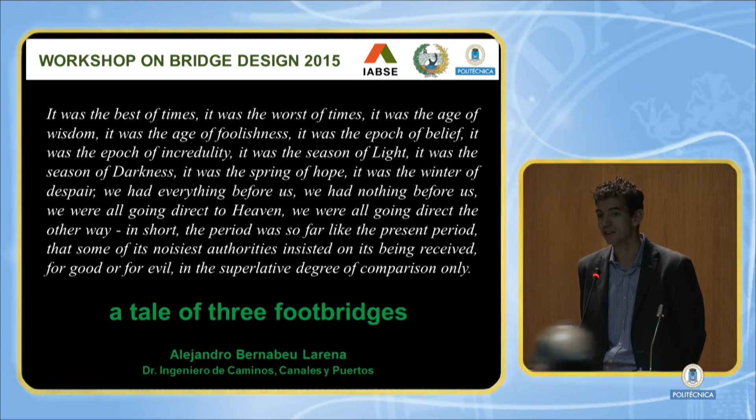Good morning. I want to thank the organization committee for inviting me to participate in this workshop on bridge design. I've borrowed the title of my presentation from Charles Dickens' A Tale of Two Cities, partly because of its famous opening lines that could easily apply to our current social, architectural, and engineering situation: it is the best of times, it is the worst of times, it is the age of wisdom, it is the age of foolishness, it is the epoch of belief, and it is the epoch of incredulity.

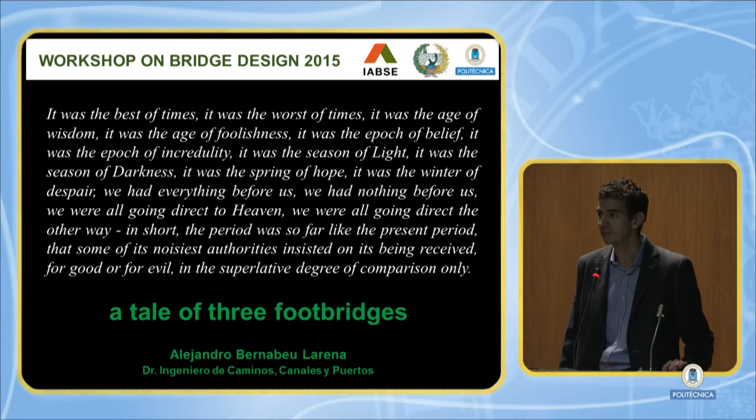But I also borrowed the title because the purpose of this presentation is to openly narrate the design process of three footbridges, considering the design criteria as well as the main technical issues.

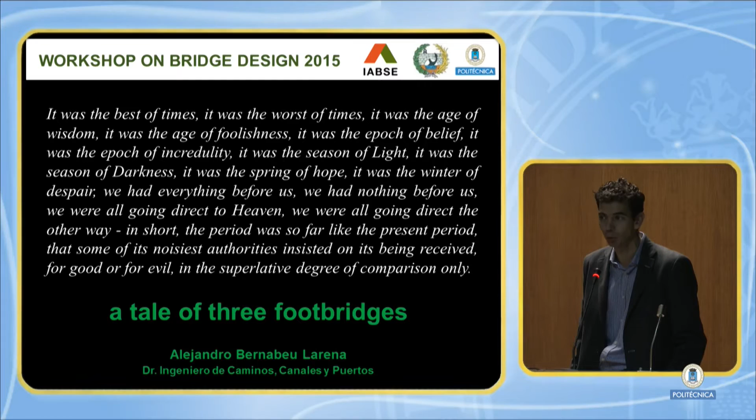A particularity of these three projects is that they have all been done in collaboration with the same architects, Ginés Garrido and Francisco Burgos. The first footbridge is located in Madrid and is part of the huge urbanistic operation of Madrid-Río, all along the Manzanares River through the city.

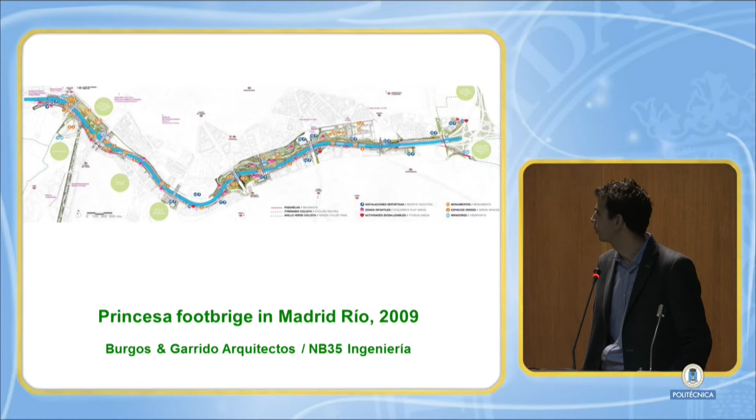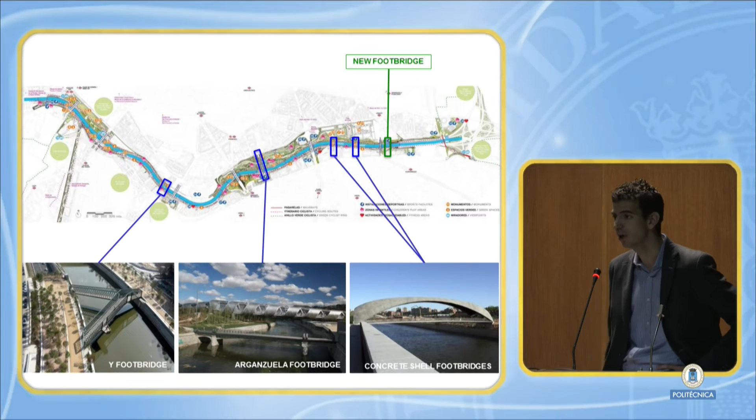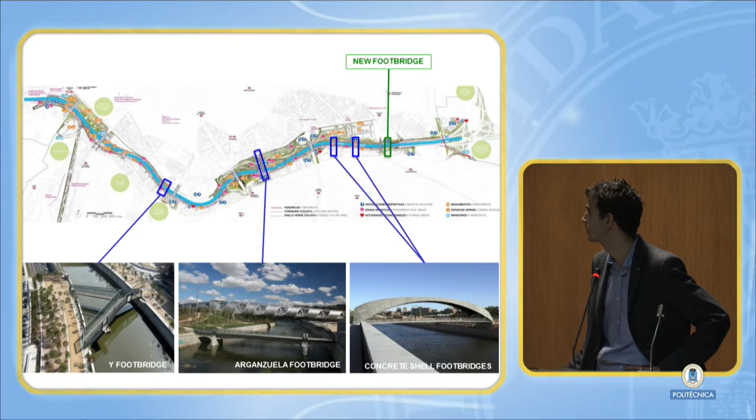When this project was designed, a number of most of the operation was already under construction, including some very singular and interesting footbridges, like the twin concrete shell footbridges, the big spiral footbridge, and the Y footbridge. This is the location of the new footbridge.

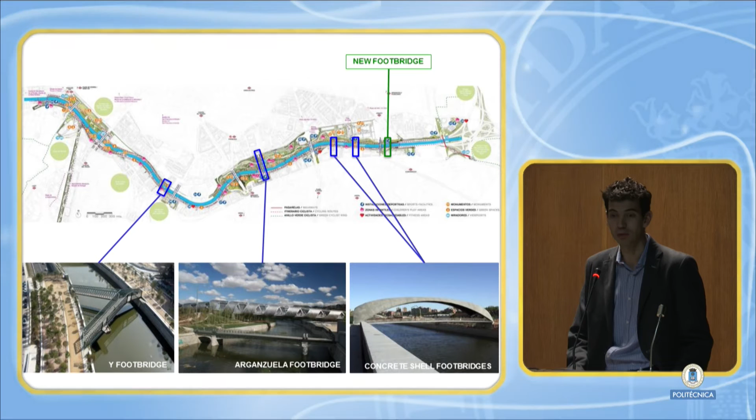With this context, and considering also the criteria of ease and rapidity of construction and economic restraint, we proposed a very simple, straightforward solution—the purpose was almost for it to be unnoticed, as if the footbridge was already there before the operation was done.

The footbridge is just a 43-meter span, straight line, with a very uncomplicated structure formed just by a couple of plain web steel beams located at both sides of the deck that also serve as handrails.

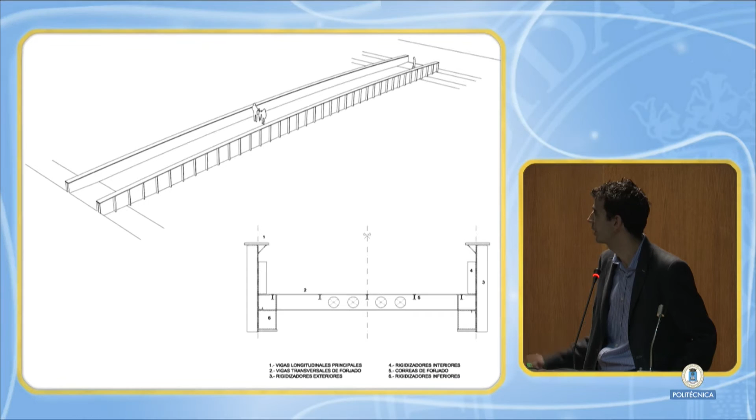It's a minimalistic solution in terms of composition, but with a couple of key aspects: the slowly varying width of the footbridge, and the location of the stiffeners seen from the outside, with the underside edge free. That marks a rhythm of the structure as well as a kind of discontinuity and variation.

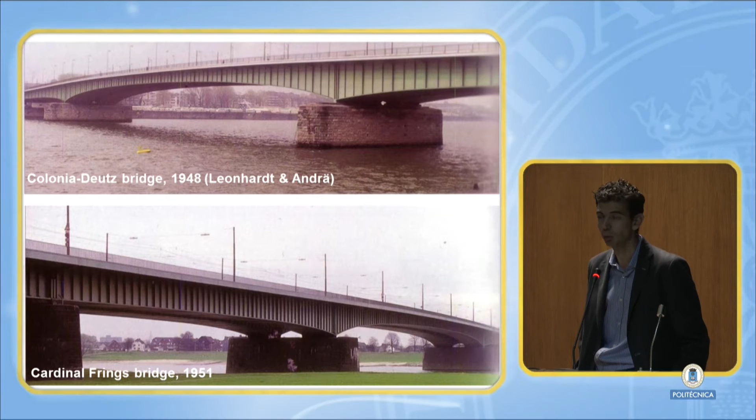It's also a small tribute, through the pale green color of the footbridge, to the fantastic German bridges built after the Second World War, such as the Colonia Deutz Bridge by Leonhardt and Andrä, or the Cardinal Frings Bridge.

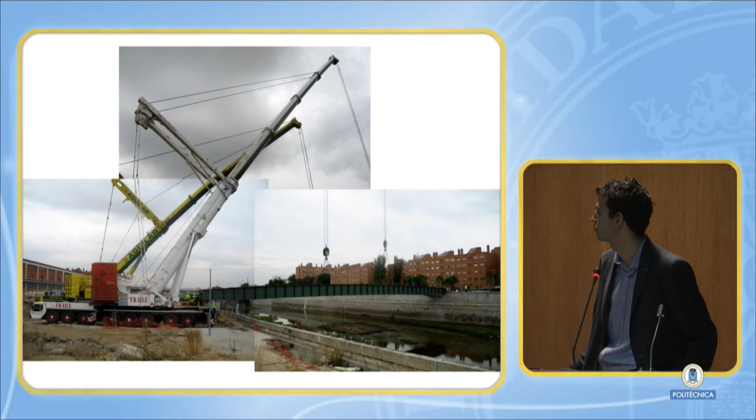The construction process was very simple. The two beams came directly to site and were set in place with the help of two cranes. The footbridge finally opened in 2009.

After this project, together with the architects, we decided to enter a proposal for an international competition for a new footbridge in Maribor, Slovenia, over the Drava River, covering a total length of 120 meters.

The most important aspect of the location for the new footbridge was its closeness to the Stari Most, the old bridge of the city, which is a three-span steel arch bridge. We decided not to compete with the existing bridge, but instead to value it.

We proposed a bridge very close to the water level, not a big structure, mirroring the three spans that the existing bridge had.

So we proposed a continuous band with a similar structural configuration of double steel beams. In this case, the shape of the beams was adjusted to form a continuous deck that was covered with wood. Technically, there was not much complication, only dynamic aspects, which I'll comment on later, following the same principles as the Princesa footbridge.

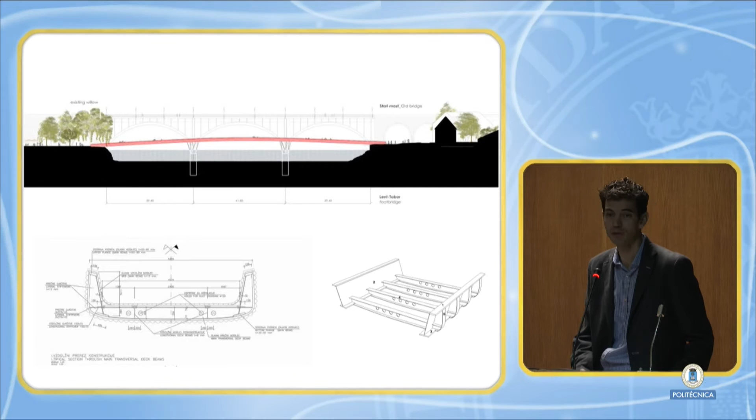An interesting issue was related to the design of the piles, proposed to be as delicate and transparent as possible to maintain the continuity of the deck.

In this sense, we proposed a set of thin steel tubes inclined in an apparently random composition, but actually related in some sense to their structural requirements.

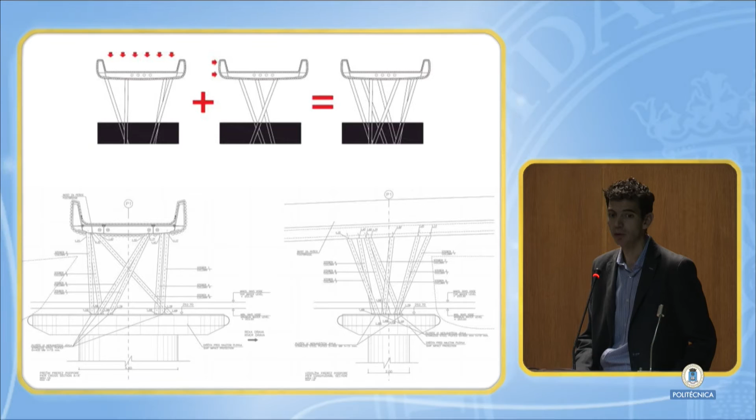Four of these steel tubes are located on either side of the deck, so they can directly support the vertical load that comes through the steel beams, while the other three are located in the center area of the deck and are much more inclined, so they can directly assure the lateral stability of the footbridge.

Here we have an image of the proposed footbridge, where we can see the transparency of the proposed intermediate piles, as well as the continuity of the deck.

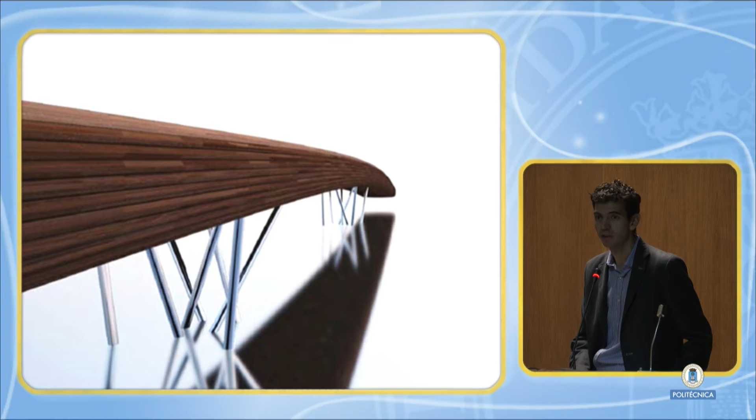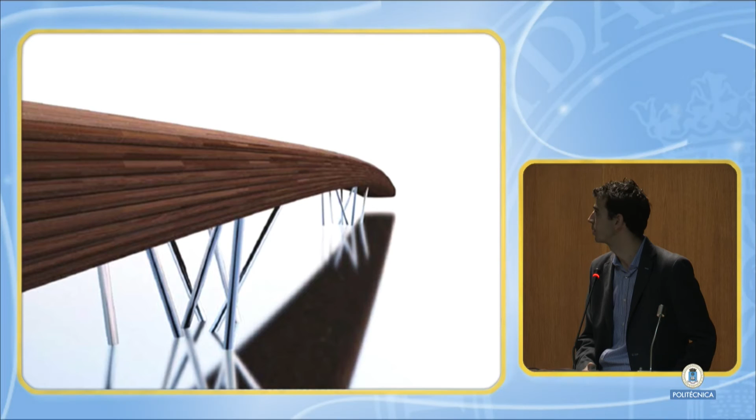The proposal was awarded first prize, and the project was developed, but unfortunately it remains unconstructed for the moment. As I said, the main technical issue of these two bridges was related to their dynamic behavior and control of vibrations. They are middle span steel footbridges between 30 and 50 meters.

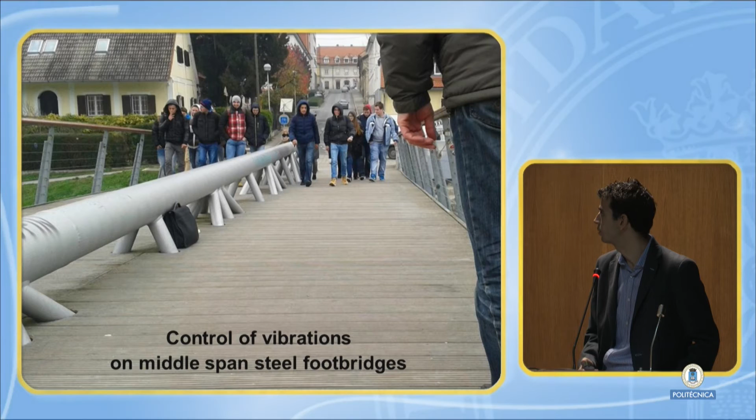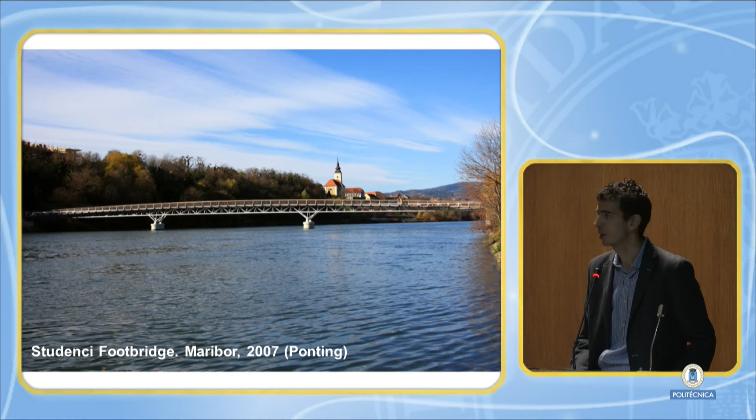They are all in the range of the same frequency, which falls well within the range excited by walkers. Careful analysis was done, and together with Viktor Markelj, a well-known Slovenian engineer with whom we collaborated in the Maribor project, we developed research on these two footbridges, as well as two other footbridges he has recently built in this middle span steel type, the Studenci footbridge, also in Maribor, not far from the Lent-Tabor footbridge, with a free span of 42 meters and a triangular steel truss as main structure.

The other footbridge is the Ribja footbridge that spans 25 meters in Ljubljana with a thickness of just 50 centimeters, a very slender proposal. This is an image of the four footbridges' sections: Studenci, Princesa, Maribor, and Ribja in Ljubljana.

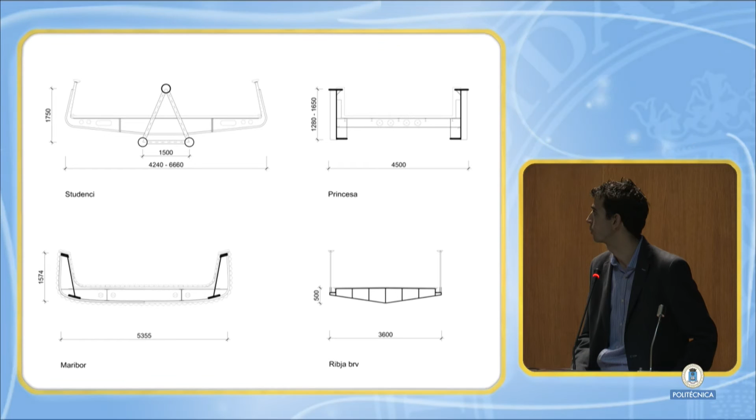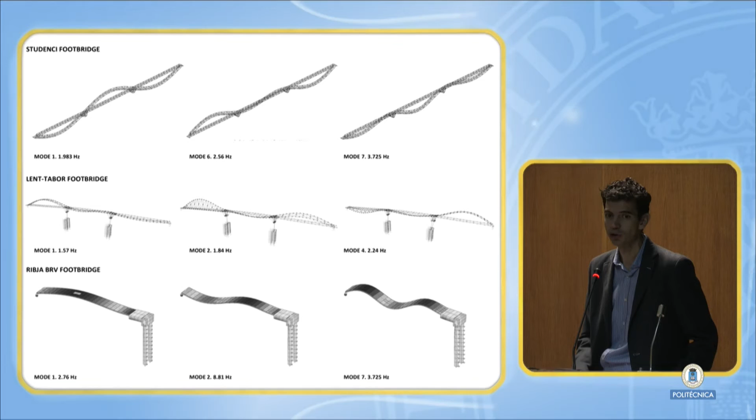Width varies from 3.5 meters to a little over 6 meters, while height varies from just 50 centimeters in the Ljubljana footbridge to 1.7 meters maximum in the Studenci footbridge. The natural frequency of all these footbridges falls in the range of 1.25 to 2.3 Hertz, meaning they are likely to present dynamic problems caused by the excitation of walking pedestrians or joggers. This is the natural frequency of the different footbridges.

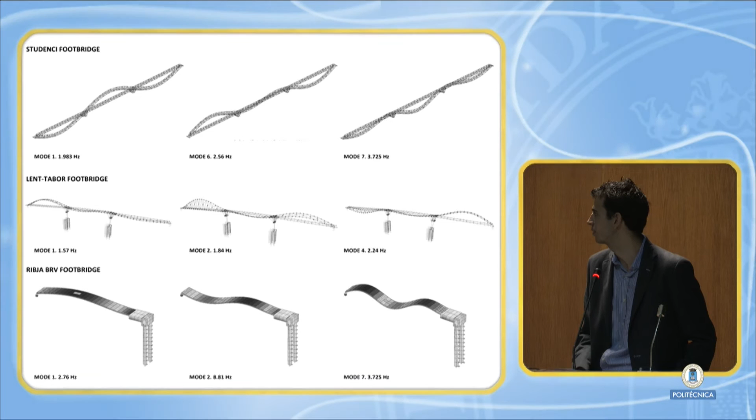This Ljubljana footbridge is a bit special, since one of the supports is a pin and the other is continuous with the abutment, which increases the frequency. In this case, we're not in the frequency range of walkers, but of joggers. So in the end, the problem was similar.

This is the acceleration obtained for walkers. We can see the Ribja footbridge in Ljubljana is okay for walkers, but as I said, it was uncomfortable in the case of joggers crossing the footbridge.

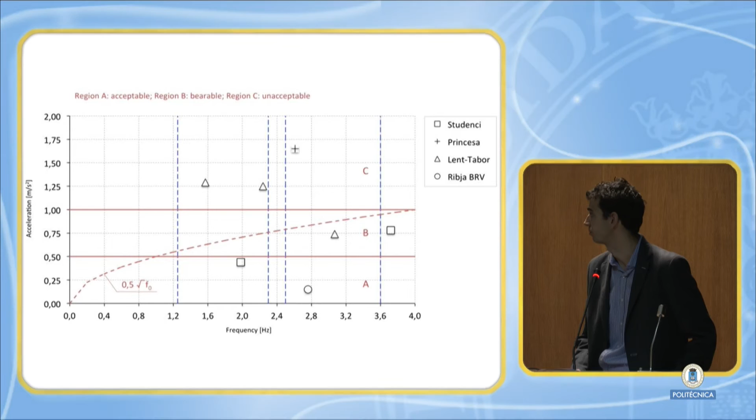In all these cases, we proposed a solution very typical in this situation: improving their dynamic behavior with the use of tuned mass dampers. Tuned mass dampers, as you may know, are formed by a mass, a spring, and a damper. The damper frequency is adjusted to a certain frequency of the structure, so when the structure is excited, the damper reacts in a different phase, reducing the acceleration. Tuned mass dampers are very small in size, so they can easily be fitted into the structure.

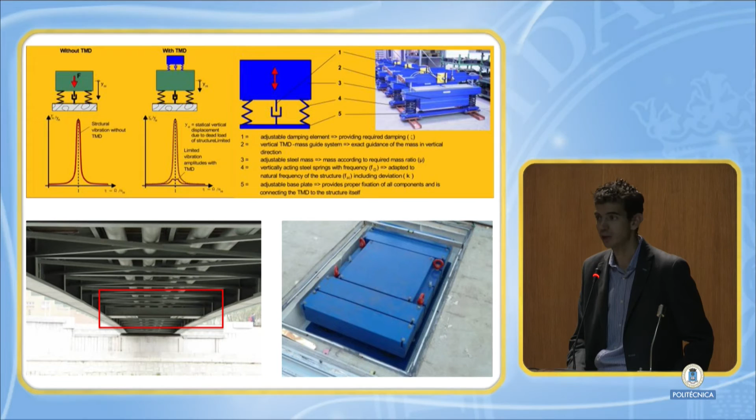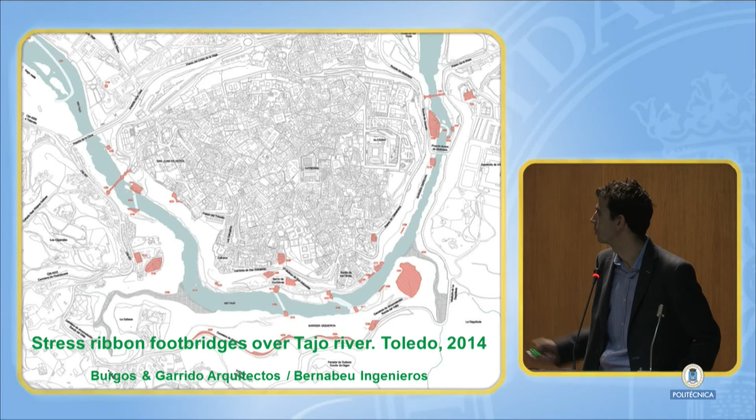As I have said, it's quite an easy operation to improve the dynamic behavior in this case of medium span steel footbridges. The last project is actually a set of three footbridges in Toledo that are part of the huge project of integration of the Tajo River in the city of Toledo, running throughout the city. This is a view of the location that has to link the two river banks.

One bank is closely related to the city, and the other is much more rural and abrupt. There were several important criteria in this case.

First of all, the 500-year flood level, represented here with this continuous line, was very high above the actual water level, meaning the structural cost had to go quite high in this view. Another criterion is that we had to avoid setting piles in the river.

We can also see in these pictures a very important difference of levels between the two banks, and the river is not centrally located, leaving an important length on the rural bank. In this area, piles could be set if desired.

There was also an intention not to build a big structure, to remain as simple as possible and as close to the water level as possible, but always respecting the 500-year flood level. Considering all these criteria together, stress ribbon structures appeared to be a good solution in this case.

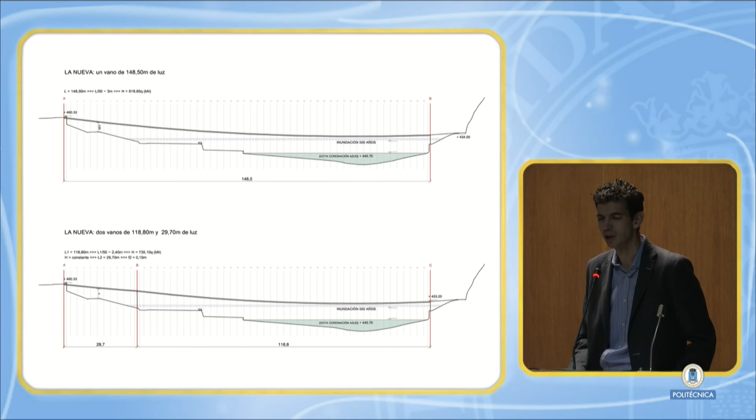In this case, a key aspect of the three footbridges was to exactly choose the location and outline, trying to minimize the maximum span, which was already in the area of maximum spans already constructed in this typology—a Japanese footbridge of 148 meters.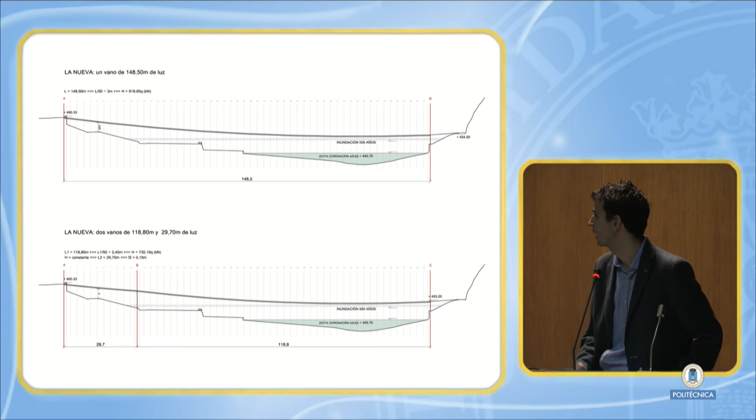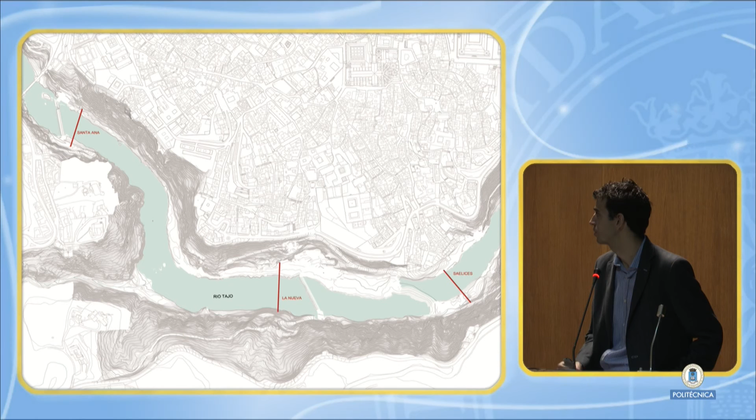Also to try to balance the different levels on the two sides, to respect this 500-year flood level. This is the outline of the three footbridges, each differently oriented to the river, adapting in each case to its location and the particularities of each site.

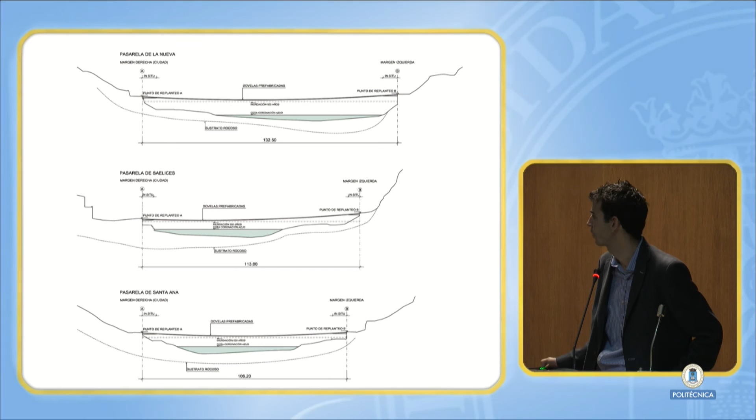And here we have the outline of the three of them, with a maximum span that varies from 108 meters to 132 meters.

Stress ribbon footbridges were formed by a concrete deck made of prefabricated elements that house channels on both sides for the lateral cables, and interior ducts that house the post-tensioning cables.

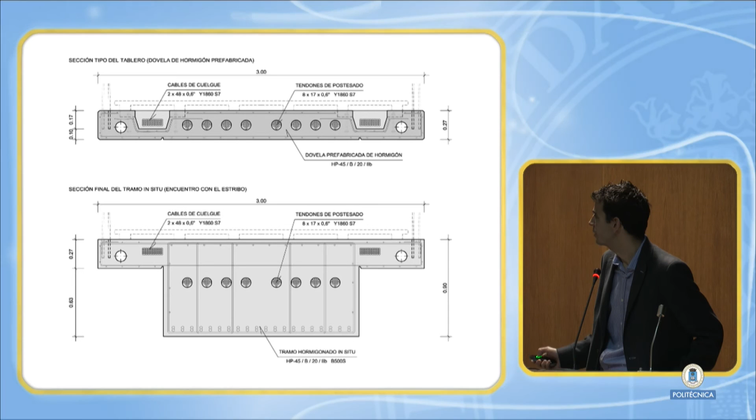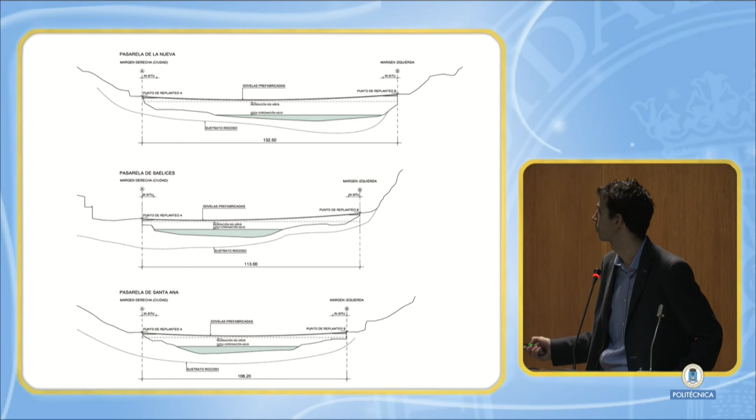This is a typical section on the supports area, where important bending efforts concentrate. For the rest of the structure, we only have axial forces, so the deck can remain as thin as possible. But at the supports it has to be increased, so these were constructed with in-situ concrete.

This is an image of construction taken from the Sacramento footbridge by Jiří Stráský, a very well-known Czech engineer who has built a number of these stress ribbon structures.

As we can see, the construction process first sets the lateral cables with an initial catenary geometry. Then the different prefabricated elements are set, hanging from these cables. Afterwards, the joints are concreted, as well as the lateral supports. During this process, the catenary geometry evolves, meaning the catenary shape varies.

And since the structural behavior is directly related to this geometry, an evolutive, non-linear analysis has to be done.

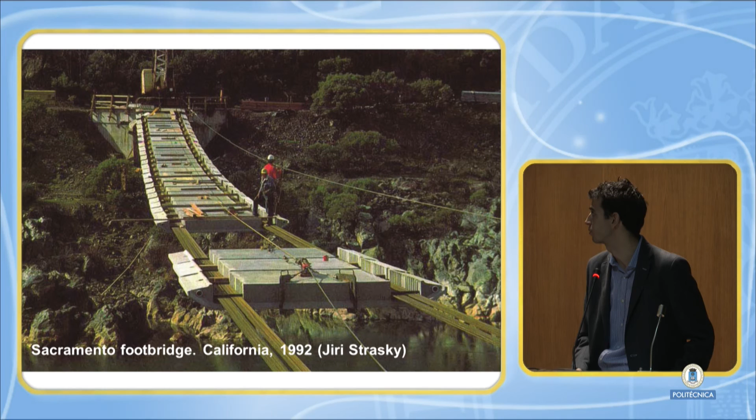This is the final shape of one of the footbridges, the one with the longest span. We can see here another important issue of this kind of structure at the abutments: since all gravitational loads are transferred through axial forces, and the slope of the catenary shape is very small, a very important horizontal effort has to be transferred to the ground.

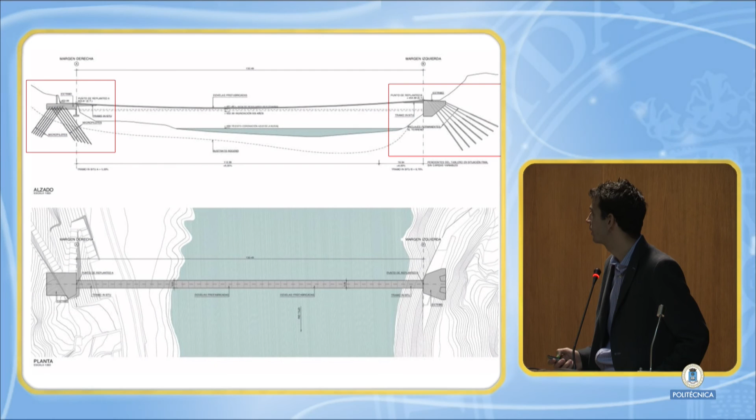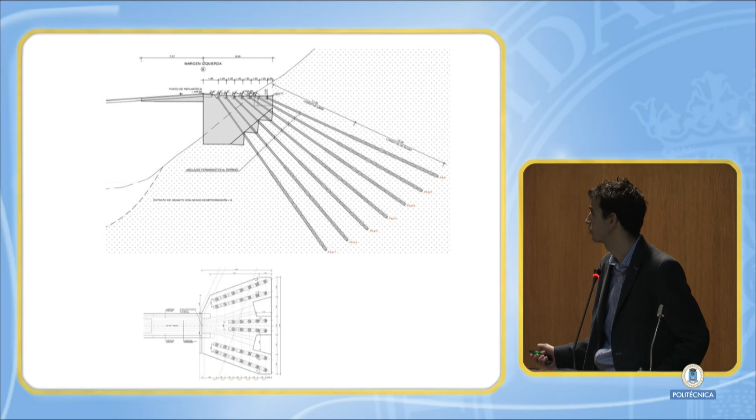Of course, the abutment solution depends on ground conditions, and in this case it was very different from one bank to the other. On one bank, the granite level was shallow, so the load transfer could be done directly through post-tension cables anchored to the ground.

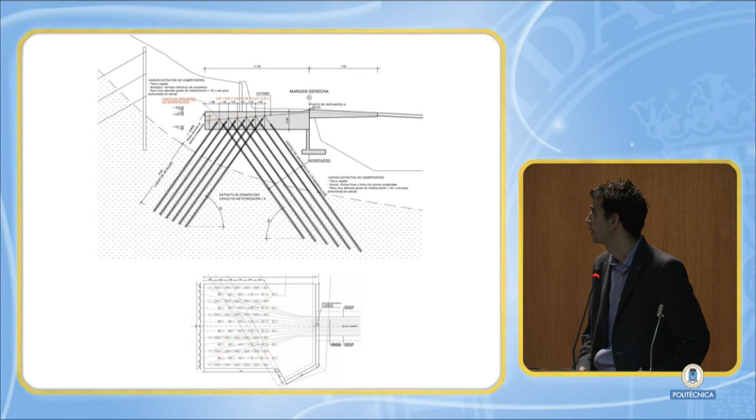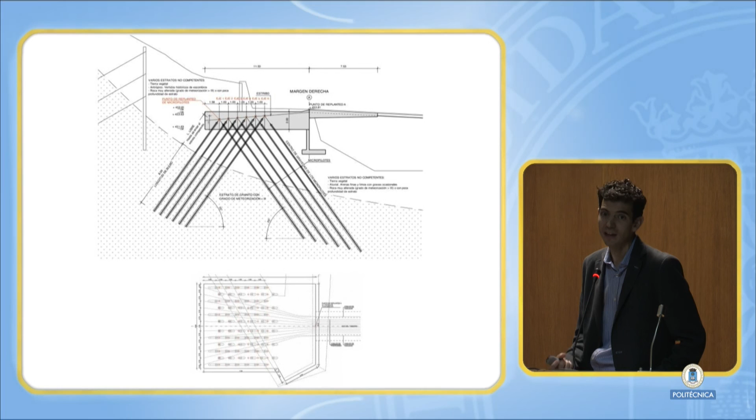On the other side, however, the granite ground was much deeper, and a set of inclined micropiles in both directions was set up. In this case, there is a certain horizontal displacement caused by the flexibility of this micropile system, and this displacement also has to be included in the analysis.

As I've said, it requires a nonlinear evolution analysis. This is just a table showing the different load phases and the state description, meaning that each phase depends on the geometry and level of effort adopted in the preceding phase.

In the first two phases, only the cables are acting, and afterwards it's the whole system—cables, structure, concrete deck, and post-tensioning cables.

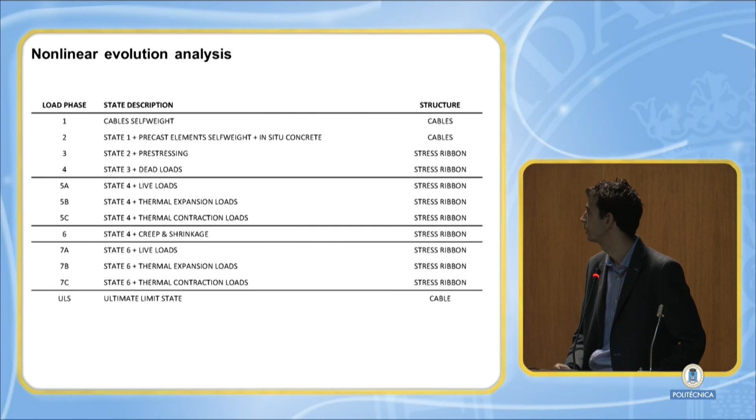In the case of the ultimate limit state, it's considered that the deck is cracked, so it's only the cables—in this case both post-tensioning and hanging cables—that assure the ultimate limit state.

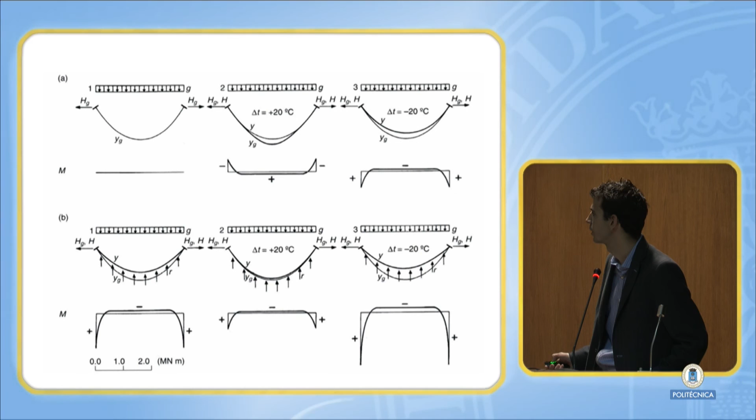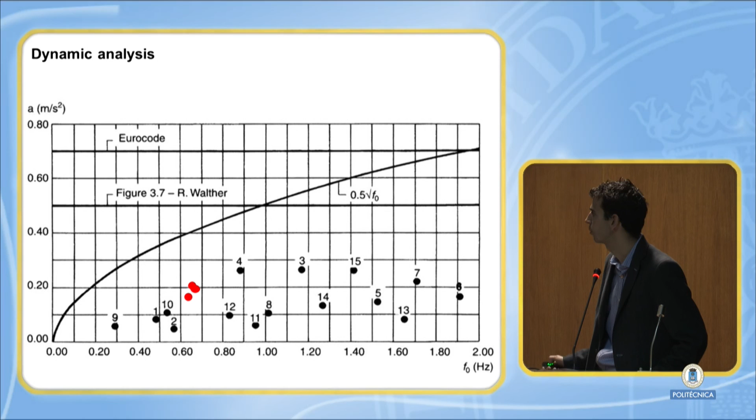In terms of dynamic analysis, this also has to be considered. But as we can see in this picture taken from Jiří Stráský's book, showing a number of stress ribbon structures with their frequency in hertz and maximum acceleration, the results all fall well beneath the maximum comfort level. The one in red is our footbridge in Toledo.

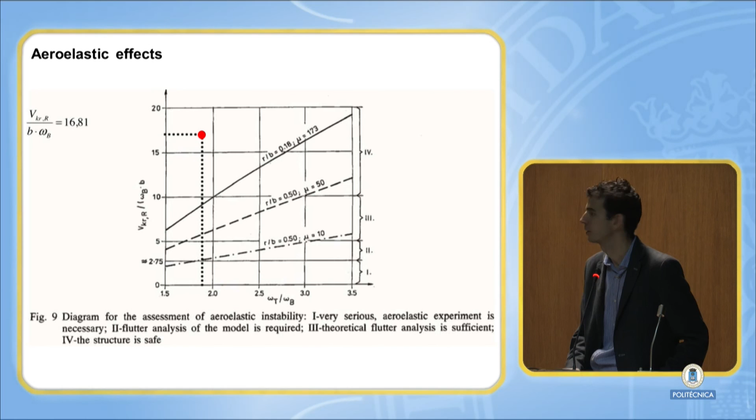Something similar can be said about aeroelastic effects, which have to be taken into consideration for spans greater than about 100 meters. But as with dynamic analysis, there are no reports of aeroelastic problems in this kind of structure, and the results fall well within the comfortable area.

And so, this is how this tale of three footbridges comes to an end. Thank you very much.